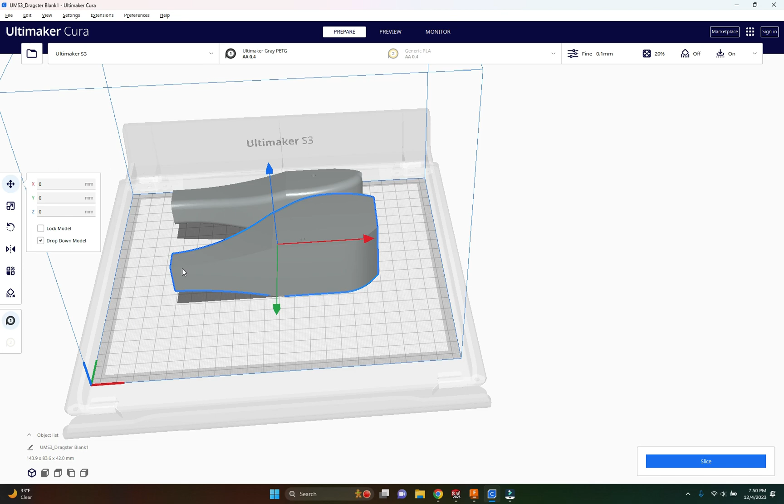Hey everyone, this will be video number 3 where we talk about how to take our dragster into the program called Cura. I'm going to rotate these around 90 degrees, make them nice and flat like so.

Okay, so in Fusion360 here, I'm going to create another sketch. This one's a little tricky. I want to create it on the edge of my wing, so I need to find the farthest one out. I know this is my longest one here, so on this wing, I'm going to create that sketch.

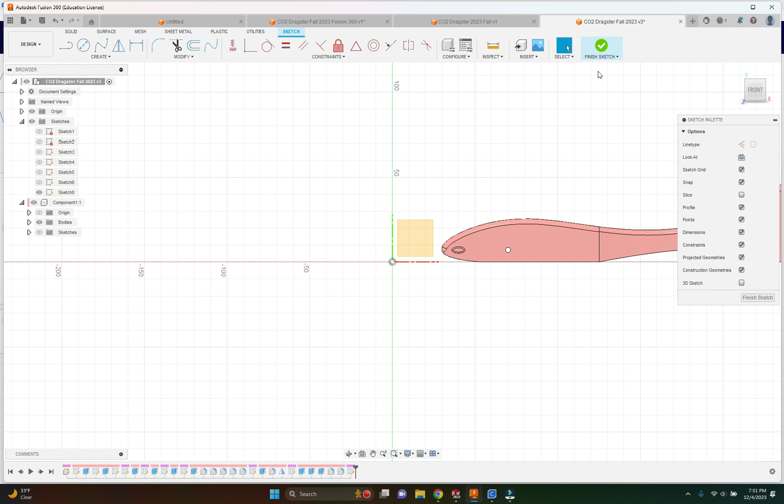Exit out of there, escape, finish sketch. I'm going to delete that one, don't need that. Okay, create sketch, then I'll create it right there on the edge.

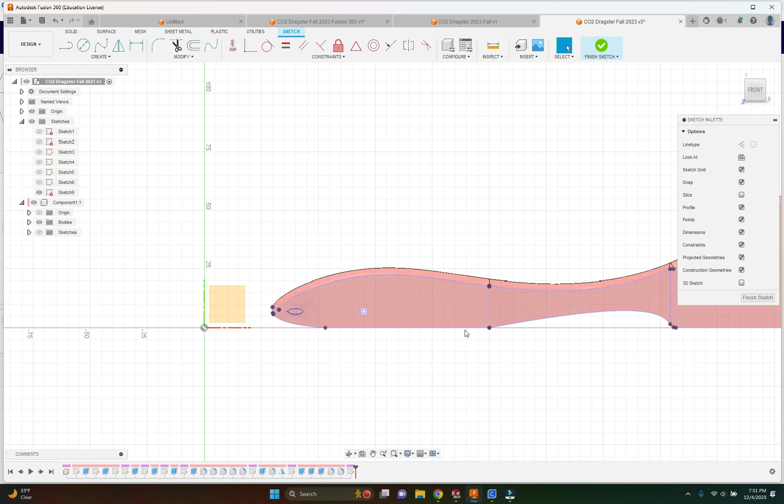Now I'm going to project on everything, P for project. I'm going to project on that. There's a bunch of different things so I can draw. Click OK. Project on a bunch of things that are on the edge. That's fine, I can hide those geometries by clicking right there.

Then I'm going to create a line. This line's going to be a construction line. We're going to drag it from the front of our car, so find the nose of your car. You need to zoom way in on it. Then we're going to draw a line straight across here to the other side, and I'm going to go past the car.

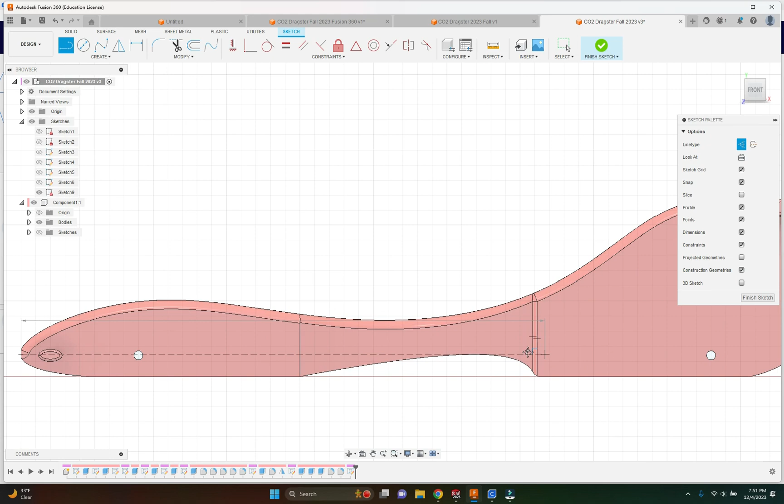Press escape. Okay, then I want to draw another line here, L for line, and draw it from back there, the back of my car, straight down. Press escape. Then I'm going to go to trim, and trim this out. Press escape. I want to find the center of my car now.

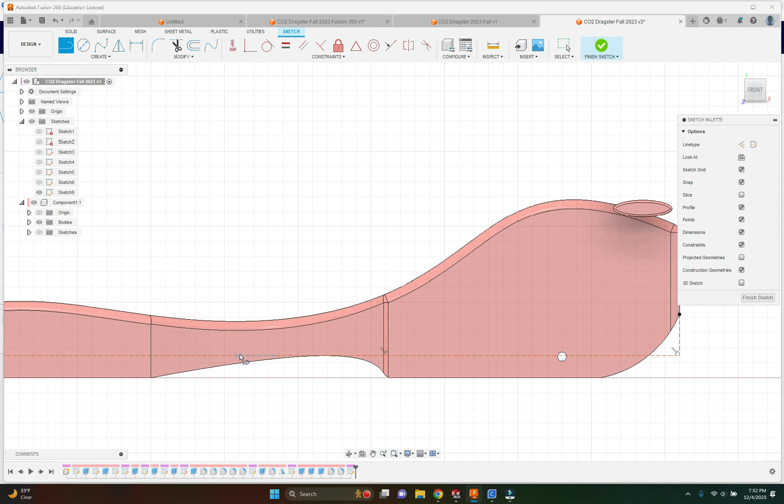I'm going to go back to my line tool, and get off my construction line, and I want to find the nose—not the nose, the center point. I'm going to get a little triangle when I find that center point, right there.

Okay, we're going to split this car in half, so I'm going to drag a big old box around this entire car here, so you'll see how this works. I'm just going to keep things as a rectangle, nice, like so. We'll try and line that up like that. Close that out. Okay, then I'm going to do the same thing on this side here.

It's a line, I'm going to go across, I'm going to go way to the front here, and I'm going to go way down, all the way down to there and straight to there.

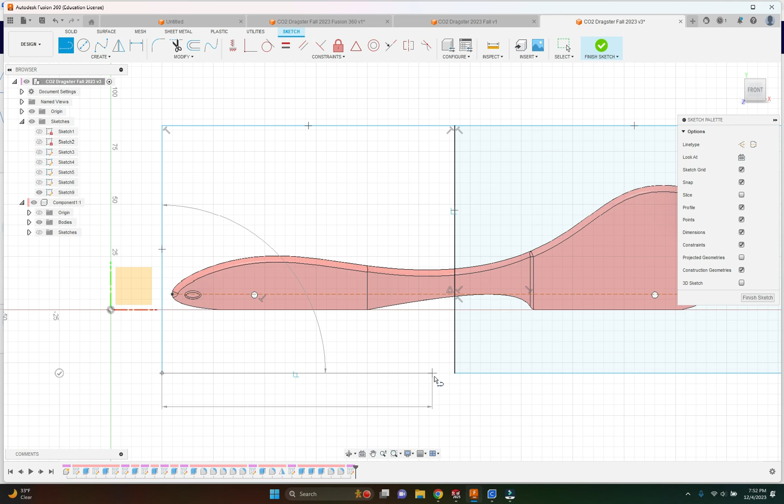Press escape. Okay, I'm going to export this back part section first here. I'll hold my shift key and rotate around. You can kind of see what I'm working with here.

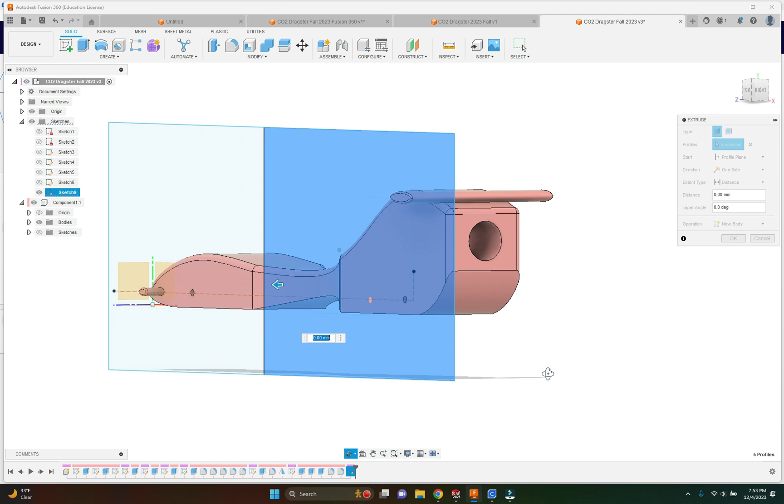Press E for extrude. I know I want to extrude that, a little bit of everything on here. Okay, you want to make sure you get all those little sections, and we'll do one more thing right there. Okay, operation is going to be cut, and then we'll drag this through like so, and it disappears.

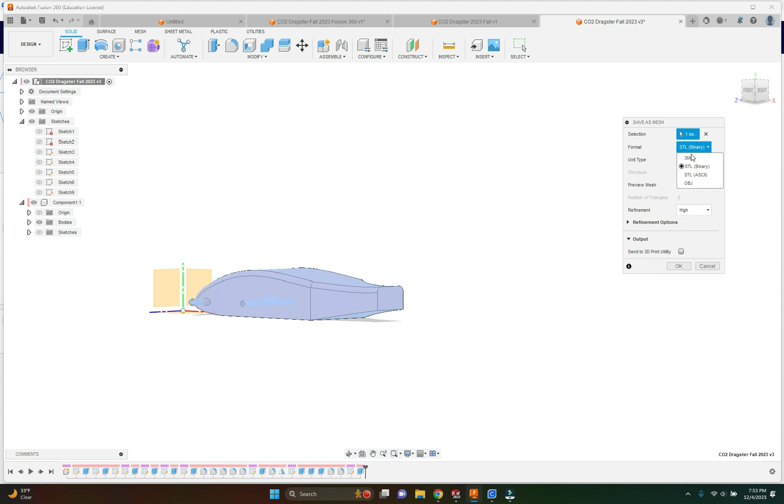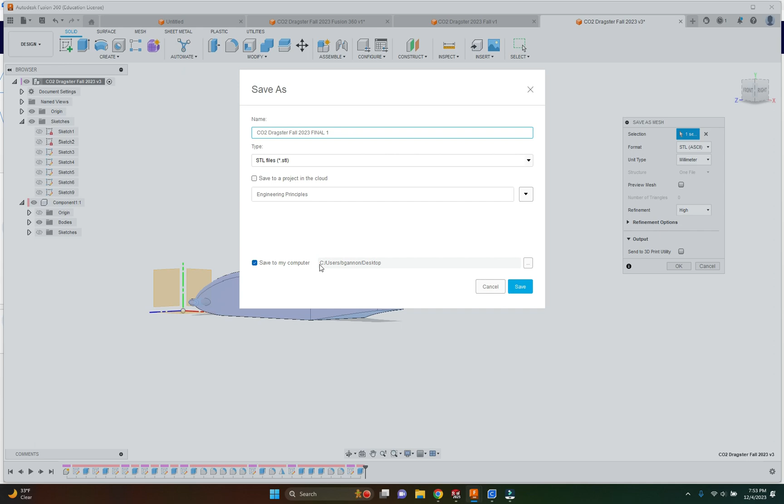Click OK, then I'm going to save it. CO2 Dragster, I'm going to do final version. Final, and this will be 1. So I have 2 parts. I'm going to save it to my desktop, to my computer, and click on save.

It might automatically pop up in here, but let me go back to Fusion. I'm going to back it up a step here. Okay, I have that there. I'm going to go back to my sketch, I know I have that sketch here. Right click on it, and I'm going to press E for extrude.

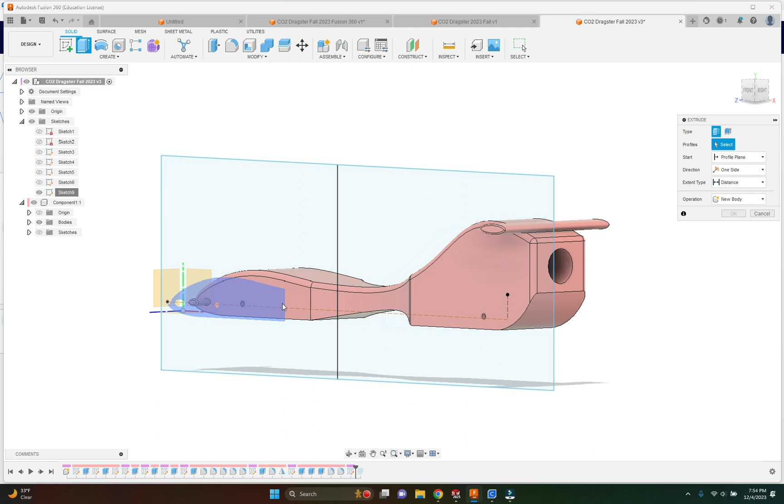This time I'm going to extrude this here, this here, this here. And I think that might be it. We'll see what this looks like here. Well, I guess I'm going to extrude the whole thing here, going across, and drag this to that side. You can see I missed that nose there.

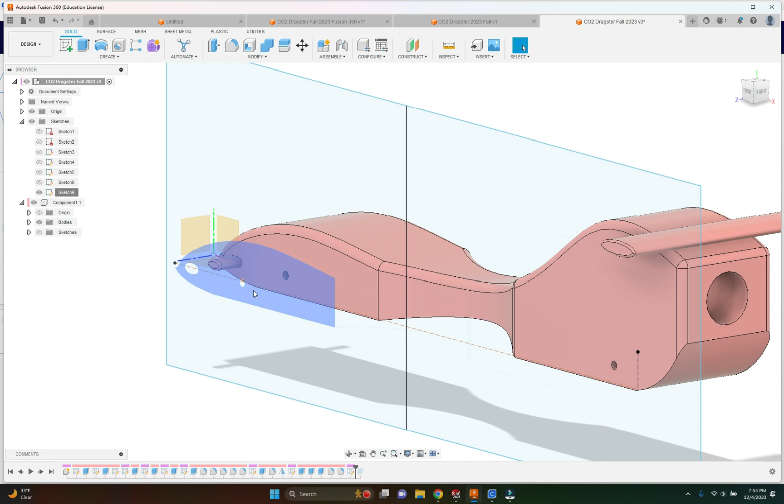Press escape, E for extrude. Boom, boom, boom, boom. I know it's a little funky with those wings on there trying to extrude all this here. Test it out and go all the way through. Operation cut, click OK, then right click up here and save as mesh. Click OK, everything should save here.

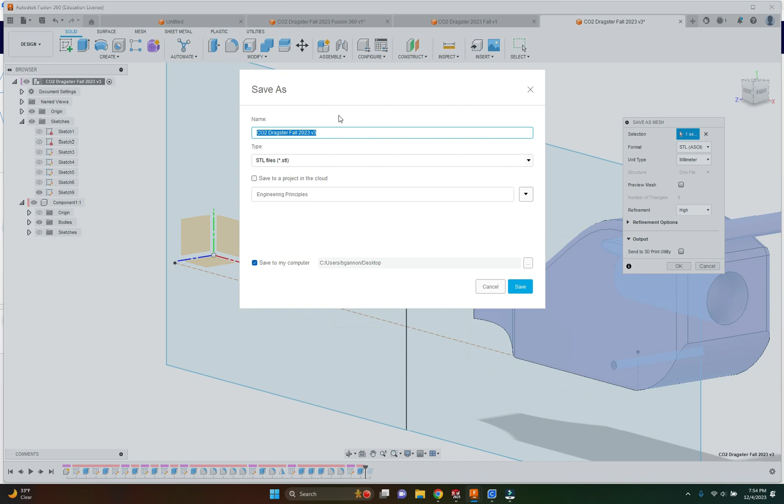Click OK, and I'll do this as final 2. It saves it to my desktop. I'm going to delete these 2 things here. Delete, delete. You can drag and drop, or go to File, Open Files, and open this desktop.

And you got these 2. Hold the Shift key, select both of them, click Open, and they both pop up in here.

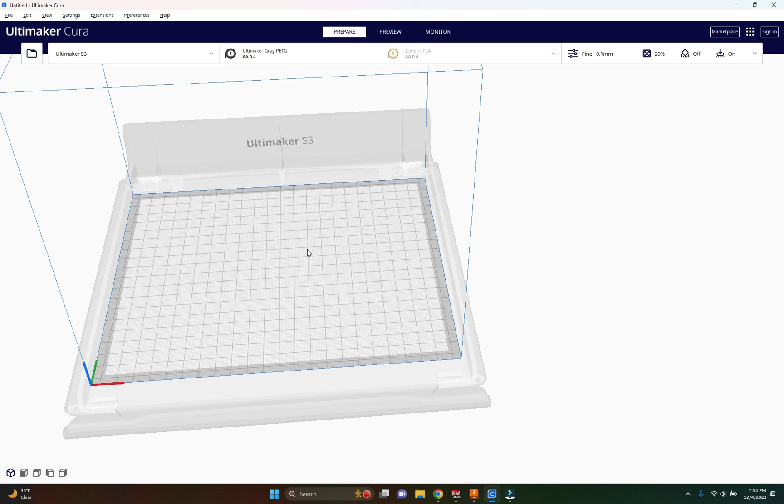So what I want to do now is rotate these around. I want to rotate this here on this axis 90 degrees like so. We'll add some support there to support that a little bit better. And then this part here, hold on, I'm using a mouse right now, so I'm right clicking on it. 90 degrees, that looks good.

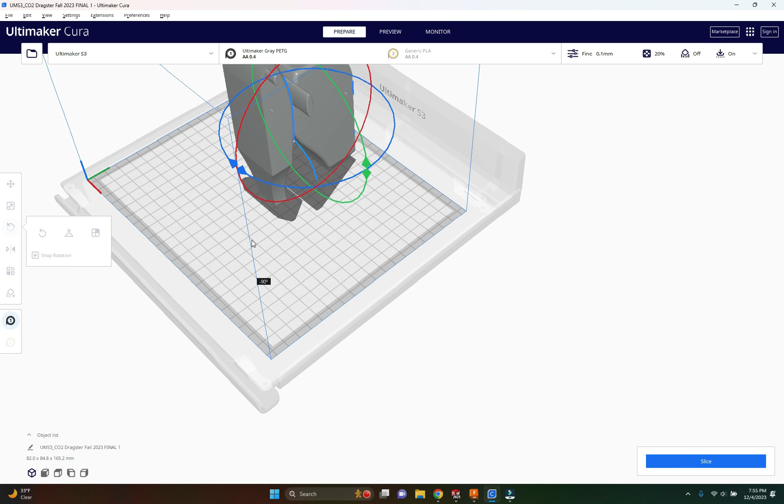Zoom back out, go over here, get an isometric view. This looks excellent. I can click on the move tool if I need to move them around. Ooh, that looks good. And I'm going to go to edit, arrange all models, and you can see what this will look like here.

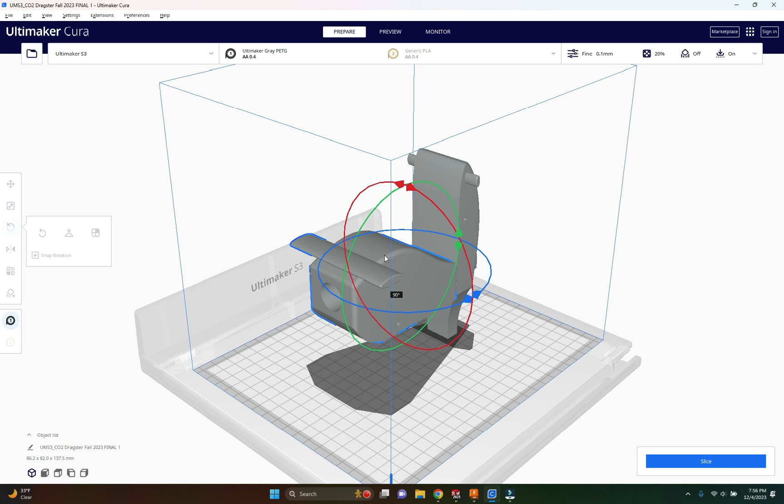So I'm actually going to move this to the other side, and I'm actually going to rotate this around again too. So I like having that back side, I think it's going to work a little bit better, kind of like that. I guess no, I'm going to need to do it the other way because I don't want support inside there, since I know I'm going to have to print support with this stuff here.

So, cool. All right, this is what this kind of looks like here, and it will have some support on here and whatnot. Up top here, I want to select support. I do want to select adhesion. We're going to go for a 20% infill. I recommend making it fine, but we don't need to go to extra fine. And then we're going to slice it.

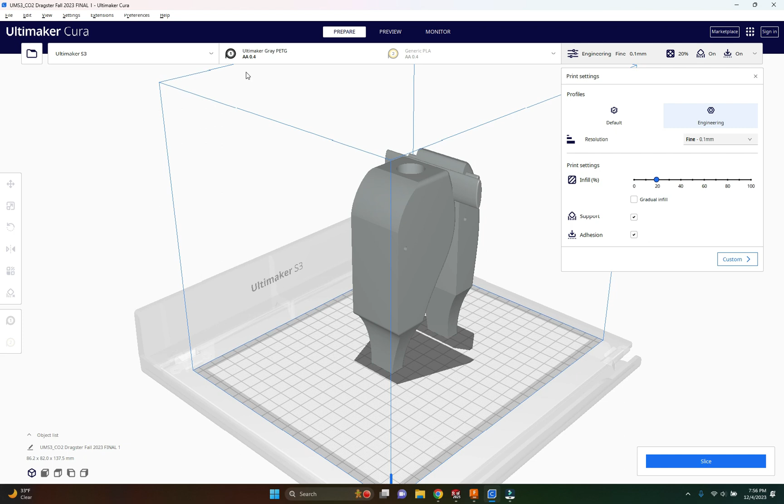One thing up here, and I'll help you out with this too - we have two different printers, an Ultimaker 2 Plus Connect and an S3. I'm going to print this on the S3, and I'm actually going to print it out of PLA. So I'm going to go Ultimaker, generic, and just PLA.

Right there, and we don't need to change the print core size, that's standard. You want to make sure our support material - we'll probably leave this off, but we might turn it on for some, we'll see how it works out. And then I'm going to slice it, see how long this will take. It'll give you how many grams it's going to be and how long it's going to take.

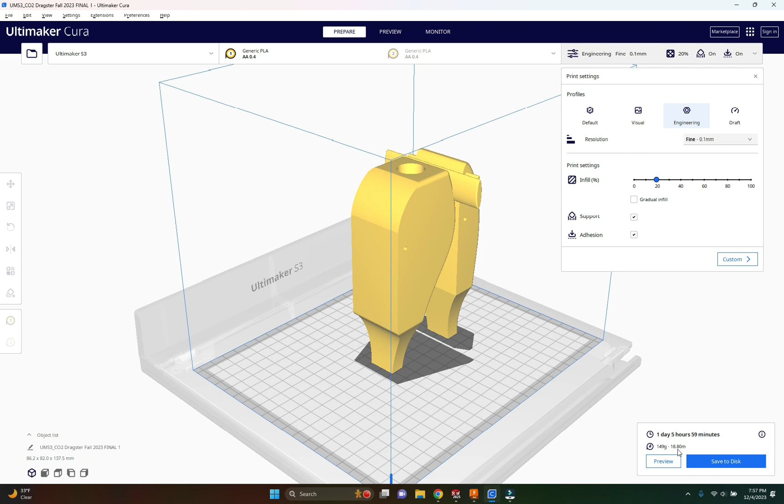So 149 grams, and it's going to take a day and 5 hours. You can preview it here to see what that looks like. You can see all this blue stuff here that I will have to actually tear off the model. Some of it's easy, especially if we use a heat gun - it's not too bad to tear off some of that support, that blue stuff right there, that will print on there. But that looks pretty sweet.

And then I'll save to disk, we'll save it to a flash drive and then start 3D printing that part. And then we will glue them together and add our wheels. Okay, this will be the end of video number 3.